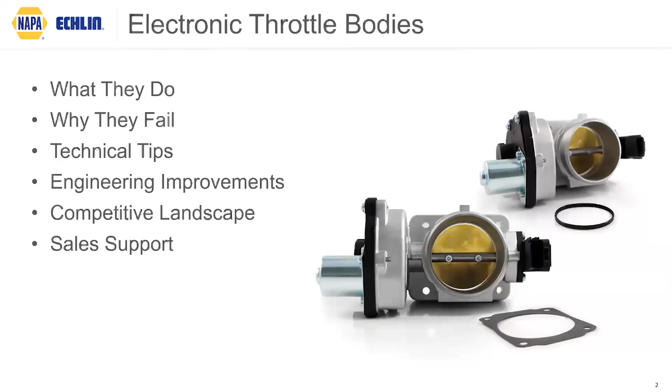So with that, let's get started on what does an electronic throttle body do? Well, it replaces the throttle cable. It's really that simple, but not, right? So the days of the cable being attached to the pedal up to the throttle body are gone. And there's several reasons for that, but most commonly because of efficiency. Now, we can feather a gas pedal with a cable. We can stretch a cable. We can break a cable, but we can't do that with today's modern systems. And when we do those kind of things, we're losing efficiency. We're also losing power. So with the new electronic throttle body system that we see on pretty much every car, at least for the last 20 years, we've taken away a variable that can snap or break or stretch and cause inefficiency. Now, with that, though, we have built upon a massive system, and it's now called drive-by-wire.

Now, when I first heard that 15 years ago, I was like, well, hold on, I thought we got rid of the cable. We did. That's not a cable. We're doing drive-by-wire, so meaning harnesses, pigtails, and sensors. And so the way a throttle body works now and what it does, it still opens and it still closes based on the command of the driver's foot on that pedal, right?

But the way it works now is when that driver puts their foot on the pedal, the accelerator pedal position sensor is going to send that command to the ECU. Now, what the ECU is going to do is decipher that command and say, well, here's how much demand we need based on what the driver is telling us they want. And at that time, it's going to command the throttle blade to open or close based on what the driver's doing with their foot.

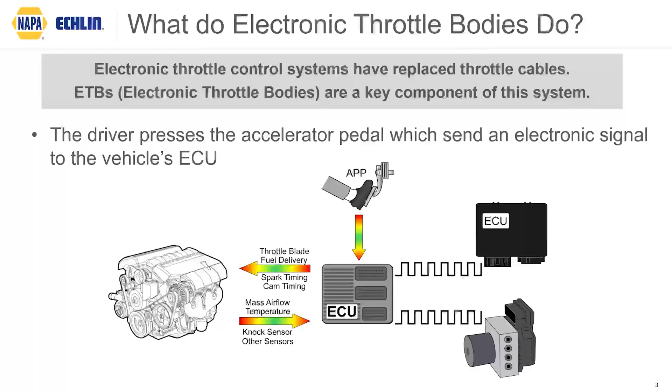But at the end of the day, what an electronic throttle body does is the exact same thing as a cable throttle body. It opens and it closes to allow air into the intake and get that motor running. It just does it differently than it used to in the past. So again, it's going to take all that sensor data. It's going to take all those inputs. It's going to read them and it's going to go, hey, here's exactly what we need for fuel. Here's exactly what we need for spark. And here's exactly how far we need to turn this motor. All that's being done just to get that motor to turn.

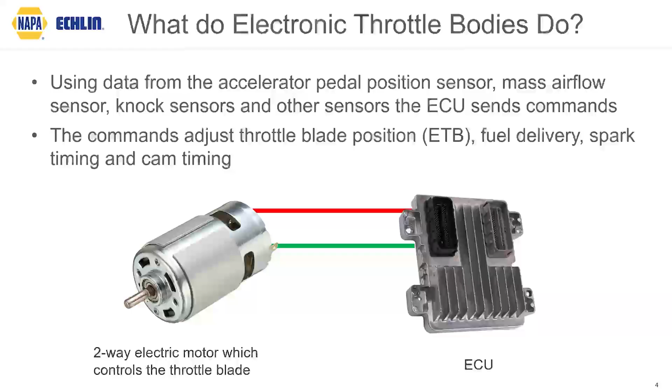So you see there, we got the two-way electric motor, and that's going to control the throttle blade. So all of those inputs, all that drive-by-wire technology is going to come together so that we can just spin that little motor. Which is kind of funny, right? There's a lot more to it, and we're going to see that here in just a second, but that's what electronic throttle bodies do. So why do they fail?

Well, there's quite a few reasons for it, but one of them is right here on the screen. We have to remember, we're calling these electronic throttle bodies, but they are not really all electronic. There are still mechanical components inside. There's still moving pieces. And the problem with that is they don't get lubrication. They have zero oil, no lubrication, and they're sealed units. So you can't service them, but dirt, debris, dust, that can still get in there. As sealed as they think they are, it can still get in there on the OE side because they aren't as sealed as they originally thought they were going to be. So it actually causes a lot of issues on the inside gearing.

And not only that, if that's not the issue, a lot of the inside gearing on these electronic throttle bodies in the market, especially OE, they're going to try to cut costs as much as possible when they're building every unit. So in an electronic throttle body, there's a lot of technology, there's a lot of expense. They're going to save that expense and that cost by using plastic gear trains. And we point that out specifically because the word plastic is something we don't want to use in certain situations. This is one of them.

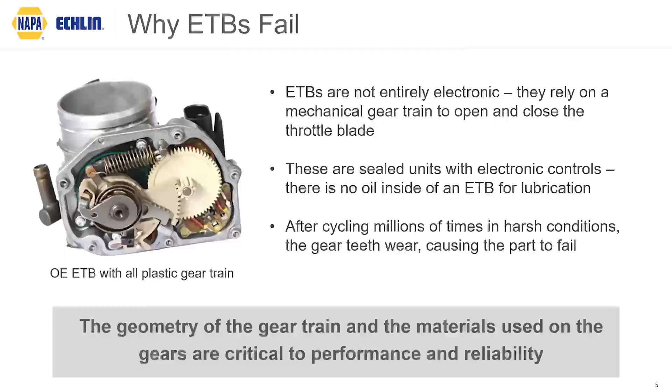And the other piece we have to think about is the geometry of the gears that are inside of the electronic throttle body. So remember, these things are cycling millions of times, heat, cold, hundreds of thousands of miles in some cases. And if the geometry is not right, there will be binding on gear to gear. We have to make sure those teeth match up perfectly, and we have to make sure that the faces of the gears match up perfectly. Think of a Rolex watch versus a Casio. That's what we're talking about here. We're talking about efficiency in the way that the gears work and move. And that's very important. You'll see why here in just a minute.

One of the most common. And what I tell everybody is you're not going to avoid getting carbon buildup on your throttle blade. It just happens over 30, 40, 50, 60,000 miles. So that is a common issue with throttle bodies. But this is an area where we might actually be able to help our customer. They may not need an electronic throttle body at all. They may just need to clean that carbon buildup.

But I will give you a word of caution here. If you're going to clean a throttle body and get that carbon buildup off to see if that is the fix, we got to make sure we take the throttle body off completely. You can't just clean the front side. And if you want a surefire way to damage the backside, that is to try to push a rag behind the throttle blade and clean it from that way. It's not a recommended idea. It generally will cause some type of damage or failure. So just go ahead and take the throttle body off, and we'll talk about what needs to be done after that here in just a minute. But sometimes you can fix a throttle body just by cleaning them.

You can also have a failed throttle position sensor. Now, in some cases, those are secondarily located, so you can just replace it. But in others, they're actually integrated into the throttle body. So in some cases, if that breaks, you will have to replace the entire throttle body. You could also have a failure of that motor we talked about, and then also that gear train failure.

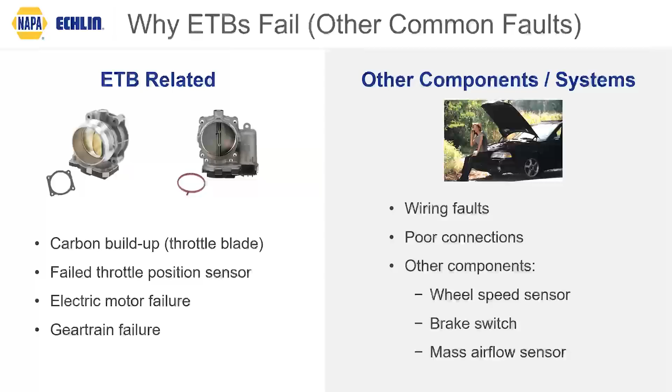So here's a quick pro training tip. Remember I said, if you're going to clean the throttle body, we got to take it off, right? We know what they do. We know how they work. We know how they fail. But one thing a lot of people don't know is that the ECM compensates for carbon buildup. So what I mean by that is if you have a vehicle with 100,000 miles on it and you've never replaced the throttle body, it for sure has built up carbon on the throttle blade. Well, over the time that it's built up, it didn't just build up at mile 89,510. It was a slow progression.

Well, as that progression was going on, the ECM noticed that the throttle blade was not opening or closing the way it used to. And it knows that that's a carbon buildup issue. So it starts compensating. And over time, at that 100,000 miles, we could see anywhere from a 10-degree change in the effective opening because of that compensation.

So here's the warning and the tip. If you remove a throttle body to clean it, or you replace a throttle body with a new one, when you put it back on, the ECM doesn't know that you did that. All it knows is the car started back up and now it's not idling properly. So if there was a 10-degree opening difference, it may be at a lower idle, maybe under 800 RPMs, so a very stuttered idle, or it might be wide open at 1400 RPMs because the ECM does not know a new throttle body has been installed.

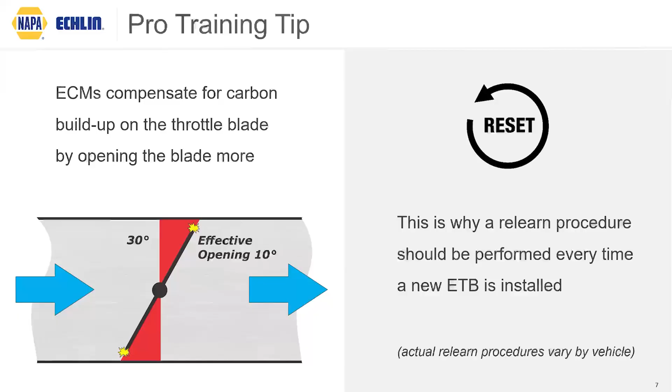Well, my question then would be, how many miles were on the car before you took the throttle body off? And did you do a relearn? That is most commonly the reason that you'll get a comeback on a throttle body: the relearn was not done. So now you know that. But for intermittent faults, here's another tip.

Oftentimes, we know we have heat, we have cold, we have rodents that get under. There can easily be an issue with an intermittent fault on the throttle body because of a pigtail. And so in some cases, if you have someone who's got an issue with a comeback on a throttle body, they're just not being able to figure out why it keeps coming back with intermittent faults. Let's back probe that pigtail to the throttle body while it's installed.

And then let's hook a scope up to it and let's watch the pattern. And while we're watching, we'll just wiggle the connectors. If we see a break in the pattern, we know we have a contact issue. Very common on electronic throttle bodies. Corrosion buildup is a real thing when it comes to terminal connectors.

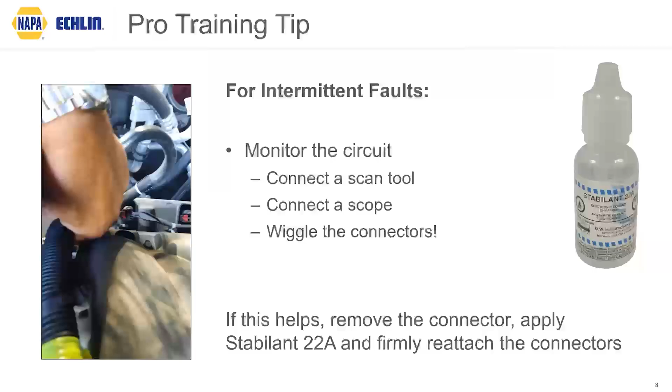And so it could be as simple as adding something like Stabilant 22A, just a little bit of contact enhancer so that the pins on the throttle body are making a perfect contact with the pigtail itself. So that's one way to avoid a comeback. Try and check that scope data as well. So there's a couple of quick pro training tips for you on that.

So again, we know what they do. We know why we replace the cable because it's more efficient. We understand a lot about why they fail now, but now let's talk about what we want to recommend to our customer. Now, I remember years ago when I was in the stores, I used to tell my teams the same thing every time, which is nobody woke up this morning and said, man, I really hope my fuel pump is not working today, right?

No, they don't want to be there. It means something is broke. And 99.9% of the time, if a customer's there to get an ETB, it failed. So it's our job to make sure we give them the right thing and make sure that it doesn't come back. So we have a couple of options when we recommend an ETB to those customers. Now, we could offer a value line. Those are out there. You can get them online real cheap.

Problem with the value line is this, though. They are remanufactured. They use old electronics inside. And if there are any updates to the gear train, they don't have it. It'll still have the old style, if it's plastic or whatever, that is prone to failure. So we're not going to get that out of a value line. We're not going to get quality out of a value line. And if we need a gasket, it's not going to come with it.

So maybe we step them up, right? We take them to an OE service part. Okay, that's great. At least it's an OE, right? But here's the problem. There are a multitude of known OE issues with ETBs, especially on things like GM, Nissan, Chrysler, where if you go with the OE service part, you're just giving the customer the same design as the part that just failed, and it's going to fail again because there's known issues with it.

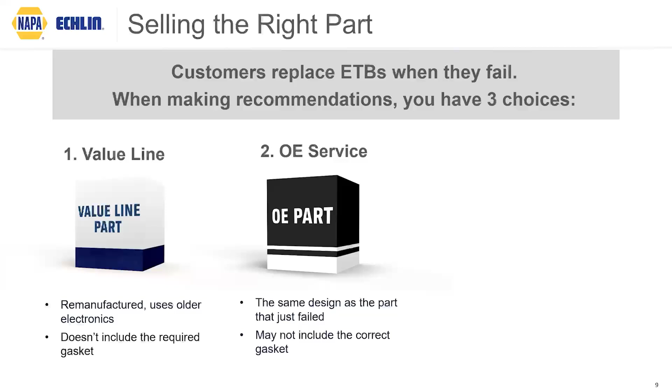What I would recommend, and I think what you should recommend, is the Tech Expert throttle body for various reasons. And here they are. One, it's 100% new. You're not going to get anything remanufactured on a Tech Expert throttle body. It's also going to have design improvements for those applications with high OE failure rates. I'm going to talk about 2 of those here in just a second.

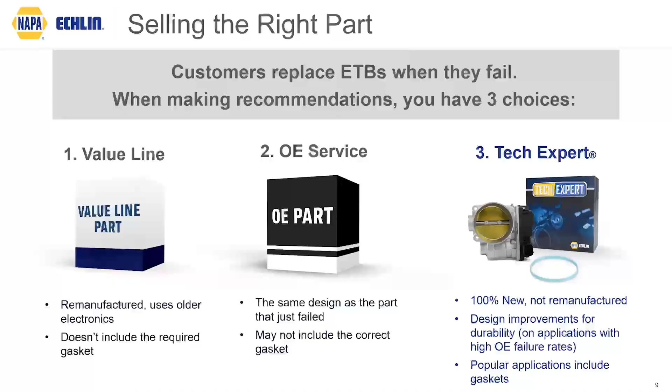And in those popular applications where we know the gasket has to be replaced, you're going to get that in the box as well. So you're actually getting an upgraded, updated, full, complete unit in the box without having to make additional phone calls. So when we talk about design improvements, what do those look like? What did we do to fix or make these better?

Well, we looked at some of the most common issue parts. Now, we could go a couple of hours talking about different ones here. I'm going to focus on two because they're pretty much the highest ones that we deal with. And that is on the Chrysler Pentastar 2 liter and 2.4 liter because of their high failure rate. And it's a result of the gear teeth prematurely wearing because of that poor geometry we were talking about.

If you look at that little bubble picture in front of that Dodge Journey, you'll see on the left-hand side, to the left of that gear, looks like a bunch of dirt and debris built up. That's actually a plastic gear, or at one point it was. And as you can see, it's trying to roll against a metal gear. Don't know why they decided to do that, but that's what they did.

And I'll say this, the Pentastar motors are definitely keeping all of us in business because this is the second conversation we've had about this specific motor this year. So this is good for us, but it's also a great opportunity for us to explain to our customer what we've done different. So what did we do to fix it?

One, we increased the face width of the gear to reduce stress. So we actually made the face of the gear larger so that it makes better contact and there's no binding, right? But we also improved the geometry of the teeth. So you can see there on the bottom, we actually made the teeth thicker and shorter so that whenever the teeth on the small gear and the large gear meet, it's a perfect mesh. There's no binding, there's no extra gaps. It's a perfect geometry with those gears next to each other.

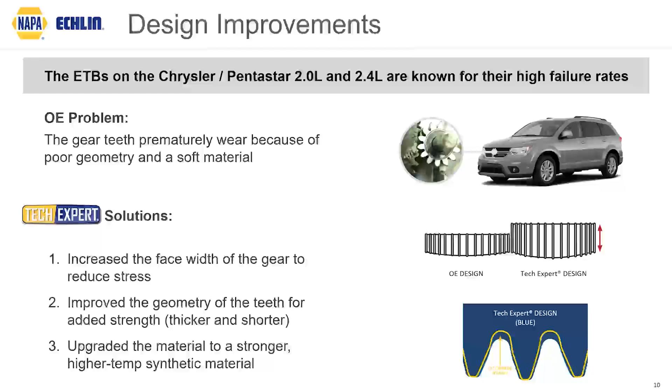We didn't. What we did is we upgraded that gear to a high temp synthetic material, which is far superior to plastic, which means not only is the geometry better, not only are the teeth stronger, but the material used is stronger. And now when your customer calls for a 2 liter or 2.4 liter ETB on those Chrysler Pentastars, they're getting an updated, upgraded unit that they won't have to replace again.

Now that's the same story on the 5.3 liters. And funny thing about this one, we could talk about this once a month, every year for another 10 years, and it would still be relevant. I know I've been talking about these for at least 12 years, and it's because there were such a high failure rate. And they still are a high failure rate for any vehicle on the road that has not had a replacement yet, maybe a low mileage truck or a car with a 5.3 in it. And the reason they fail is, again, they used plastic gears.

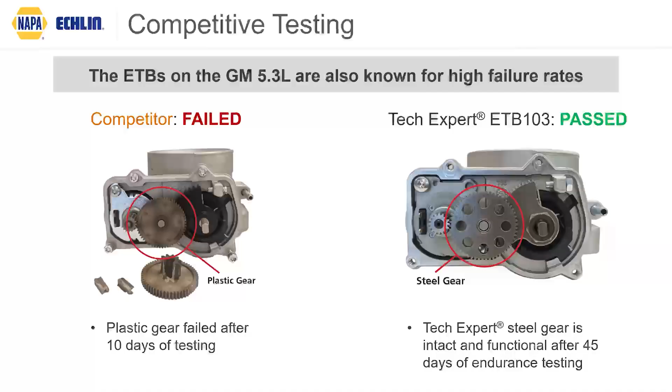So this is one of those applications where there's at least 10 shops probably putting one on right now somewhere in the US. And if they don't know that we have these available with these corrections, they're still going to call for the OE. We need to make sure they know the OE still has plastic. We're going to give them a more robust unit with steel gears. So when I say we're putting together a good program and something that you can have confidence in and your technicians can have confidence in, this is what I mean.

Whether it's a unit that we're changing the gears, upgrading to steel, changing the geometry or the way the teeth work, whatever the case is, every throttle body in that Tech Expert line is going to have the accuracy, the design improvements that are required, the durability that the technician is expecting. It's going to be 100% new. It's going to be tested and calibrated to make sure that it's going to work exactly the way the customer expects. And again, we have all the quality control in our own backyard because these are designed by us and made in North America.

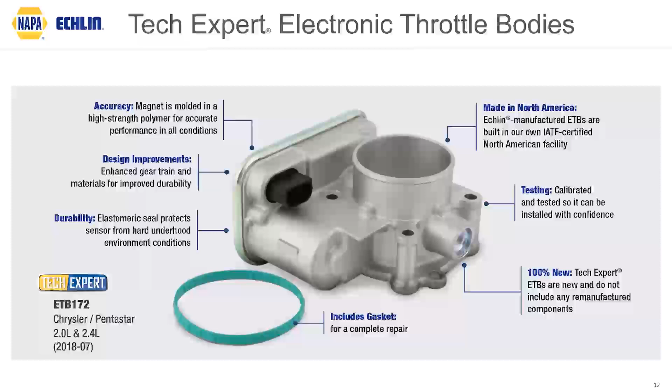And once again, if your customer doesn't want to make a secondary phone call, if it is a unit that requires that gasket, it's going to come in the box. And so before I pass it off to Aris, I'm just going to wrap this piece of it up and say, remember, the best parts make the best parts. So when we put that part in the box, we want to know that it's going to do what the customer expects and what the vehicle's looking for. Sometimes that means you have to spend a little bit more and make it a little bit better. And so the best parts like stainless steel gears, enclosed contact brushes, stainless steel throttle plate shafts, the corrosion resistant housing, all of that combined makes the best throttle body in the market.

And then with that motor down there, you can see we tested that from negative 40 degrees all the way up to 248 degrees. Now, I've said this numerous times now. I hope I never have to be in either one of those climates. But even if I did, at least I know my throttle body is going to open and close the way it's supposed to, because that motor will be able to function.

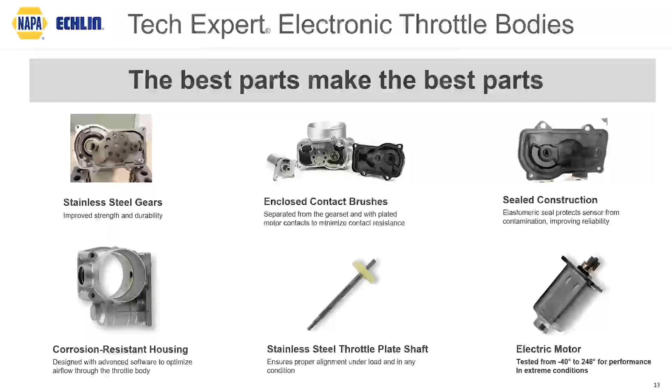And so with that, Ms. Aris, I'm going to pass it off to you because I think they would like to know a little bit about the competitive landscape and how they can go to market with what we are offering here. So it's yours. All right, thank you, Corey. Great tech tips and breakdown of the engineering behind ETBs, or electronic throttle bodies. I call it ETB just to shorten it.

Hello, everyone. So now let's take a quick look at the competitive landscape. I know you probably hear a lot of claims about coverage, but this is a real picture. Tech Expert leads the pack with 218 SKUs and coverage of over 210 million vehicles in operation, or VIO. That's more than anyone else on that board. And what does that mean to you? It means fewer special orders, fewer missed sales, and more chances to say yes to your customer immediately. We are built for this, giving you the coverage and confidence to deliver quality without hesitation.

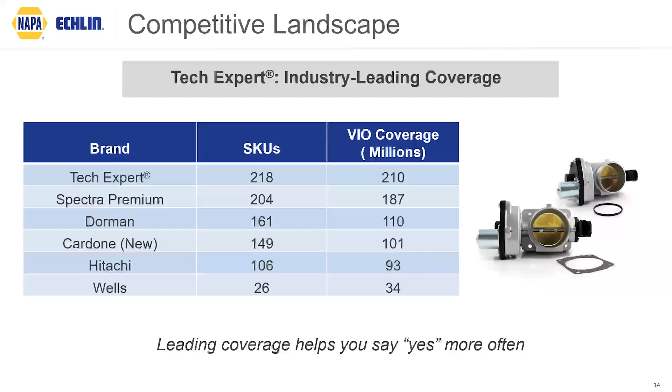Because at the end of the day, it's not just about having more SKUs. It's about having the right SKUs backed with quality you can trust to strengthen and grow the relationship you have with your customers, making you their number one and preferred call every time. So building and maintaining a strong relationship and keeping you your customers' go-to call when something goes wrong is very important to us. Tech Expert wants to make sure you've got everything you need when it comes to electronic throttle bodies. And that means more than just the electronic throttle bodies themselves.

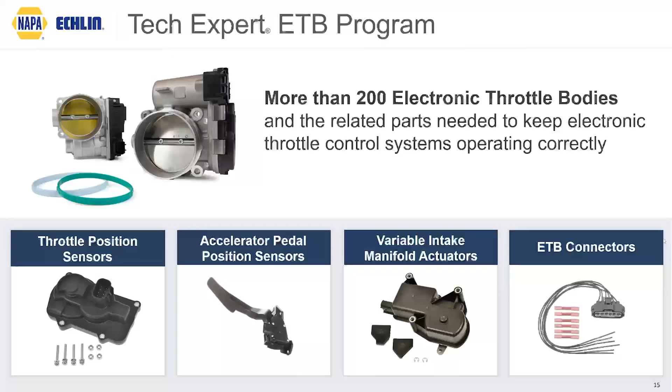As Corey mentioned earlier, there are more components related to the ETB system that may cause failure, and we back it up. Tech Expert is stocked with throttle position sensors, accelerator pedal position sensors, variable intake manifold actuators, clean plug-and-play connectors. That means no scrambling, no callbacks, no outsourcing parts and waiting for them, just a full solution ready to go. And it's all built and backed by the same engineering team that understands this tech inside and out. You can recommend it with confidence.

Now, when it comes to throttle position sensors, one of the parts related to the ETB system that fails, we're not cutting corners. In fact, many of these are built right alongside our ETBs in the same high-quality facility. Inside the throttle position sensor, we've got an integrated circuit that does the heavy lifting. It precisely measures throttle shaft movement and gives you the accurate linear signal you can rely on.

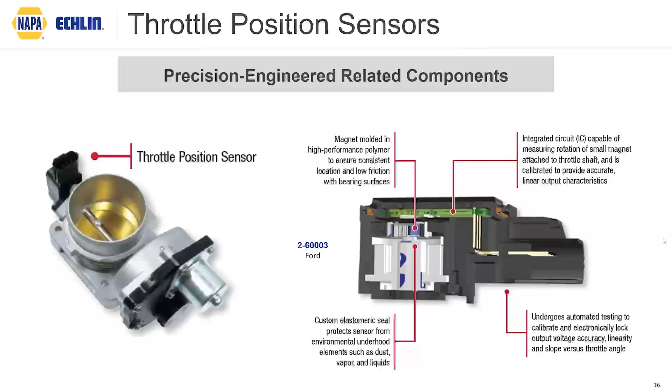And what really sets it apart is the magnet. It's molded into a high-performance polymer, which locks in the right spot and minimizes friction on the bearing surface. Then we seal it up with a custom elastomer seal that keeps moisture out. And we've seen firsthand how that's a common failure point in some competitors' throttle position sensors. So what's the result? A throttle position sensor that's reliable, consistent, and built to outlast the environment every time.

So now another part related to the ETB system that fails is the accelerator pedal position sensor, or APPS to shorten it. Accelerator pedal position sensors are mission critical for modern throttle control, and we make sure every single one of ours is 100% tested to deliver the most accurate signal versus pedal position. We've got over 350 SKUs in the lineup, covering 3 decades worth of vehicles, which means when that repair opportunity comes, we likely have the solution.

So what about the performance of the Tech Expert APPS, or Accelerator Pedal Position Sensor? Our designs are engineered to contact with just a few grams of force, so acceleration and deceleration feel smooth and responsive. Plus, we build in high-strength dual return springs that give the pedal that confident, consistent feel that the driver expects every time they hit the gas.

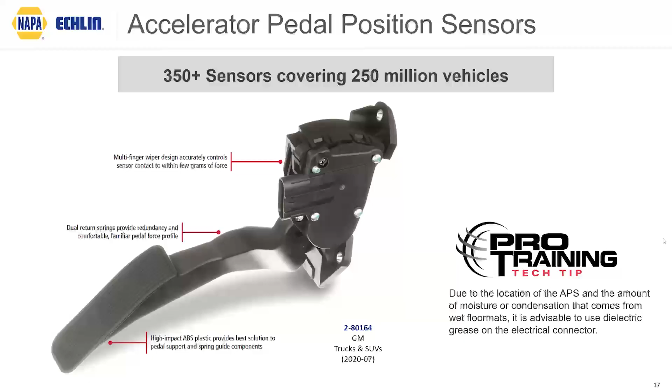So, at Tech Expert, we are very proud to be one of the few true manufacturers of electronic throttle bodies in the North American aftermarket. Every ETB we make is calibrated and tested in-house, including output voltage validation, but we don't stop there. We go beyond the bench and into the real world with on-vehicle testing at our facility in Texas, like Corey mentioned earlier. That gives us a huge advantage. Many offshore suppliers simply don't have access to the wide variety of test vehicles and equipment that we do. And it shows in the results.

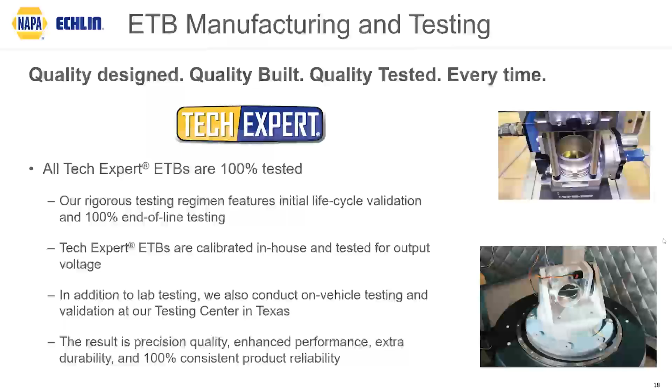With Tech Expert ETBs, your customer gets a part that's been through truly rigorous lab testing and real-world driving. When they pull it out of the box, they can install it with confidence, knowing it's built to outperform the competition. And with that, I now hand this over to Rob in Marketing Services, who will walk you through the available tools to support these high-quality products.

Rob? Thanks, Cerise. How are you? Hello, everyone. My name is Rob Watson.

I am a Senior Marketing Services Manager at S&P, and I'd like to spend a few minutes today discussing the sales support that our team offers, specifically the product and marketing material that's available to you when speaking to your customers about Tech Expert electronic throttle bodies. Now, our support doesn't stop after we place a part in a box. Our team is always focused on providing support material that helps convey our strong product messaging. For electronic throttle bodies, we've produced a few pieces that we believe accomplish that, some digitally and some in print. But we're going to start here with the print pieces.

First, I'd like to mention our ETB brochure pictured here. It explains the design improvements that we make to our ETBs to deliver a more durable unit. It also details the many features and benefits that explain why our new, never reman ETBs outlast the original units they are replacing. Other notable pieces here are our ETB flyers, one from our What's in Your Box series. This one details our commitment to quality manufacturing, including design improvements that are engineered into our ETBs.

You can also see how our units measure up to the competition. That's on that lower right image. You can see how it compares to competitor units in our endurance testing. The other is our new item spotlight that details the ETBs that have been released over the past few years and are gaining in popularity. These pieces are all available to order from your Echlin rep or available for download on napaechlin.com in our digital resources section.

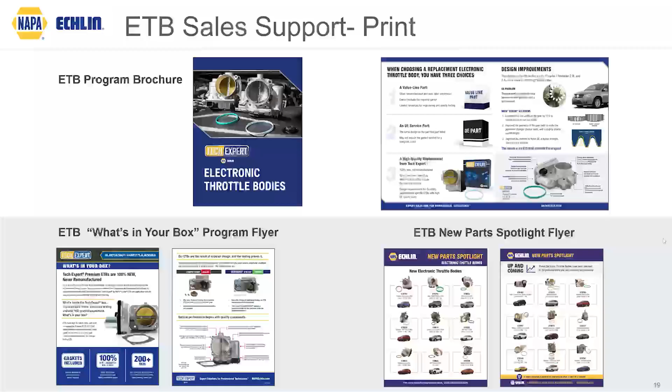Here, I'd like to discuss some of our digital support material. First, as part of our What's in Your Box training series, our team created a short 4-minute video on electronic throttle bodies that does a really nice job of explaining our commitment to quality manufacturing and establishing us as an expert electronic throttle body manufacturer. We review the wear points to the original and engineer improvements, many of which we've already discussed early in the presentation. From redesigned gear trains to stronger internal components, these improvements result in a more durable and more reliable ETB.

It's another resource that you can use to share with your customers. It's available on our Echlin YouTube channel and can be found in our What's in Your Box series playlist or in the ETB playlist on the Echlin channel. Now let's actually move on to the Echlin YouTube channel.

So another resource that's available is the NAPA Echlin YouTube channel. And the channel features more than 500 videos, including videos that detail the features and benefits of our products and programs, videos that demonstrate our engineering and manufacturing capabilities, as well as installation and technical videos. We also place our videos in product-specific playlists to make them easier to filter and to find. And again, the playlist includes the training video series video that I just mentioned, as well as the other ETB videos that are available.

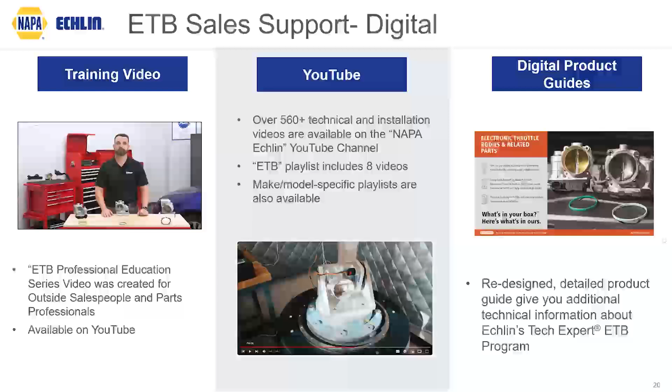And coverage, we have to talk about coverage. We have industry-leading coverage with more than 200 SKUs, covering more than 200 million vehicles in operation. We also talk about testing. Tech Expert electronic throttle bodies are tested in the lab and on real vehicles at our vehicle testing center in Irving, Texas, to always ensure they perform under all operating conditions.